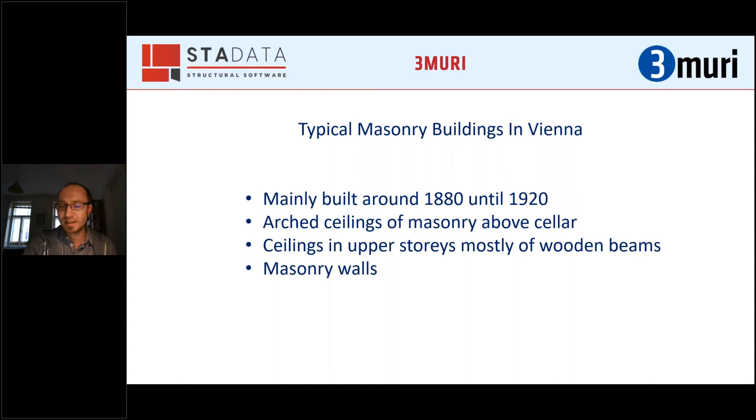Our planning tasks consist mostly of typical things: removal of walls, addition of an elevator or parking garage, and last but not least, the attic conversion, which is the most typical thing. Addition of elevator and parking garage comes together with it because this is bound together by the authorities. If you want to build an attic conversion, it is a must that you also build an elevator and parking garage. So that means in that case you have to take care of all of these parts.

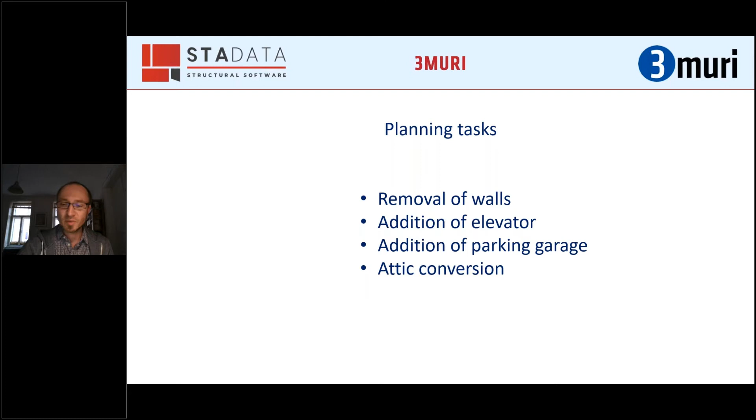The material part is mostly tested with in-situ tests. Sometimes they also take some parts of the bricks and the mortar, but it is mostly done with in-situ testing. You can see these are more or less the characteristic values I was writing there, which we found here.

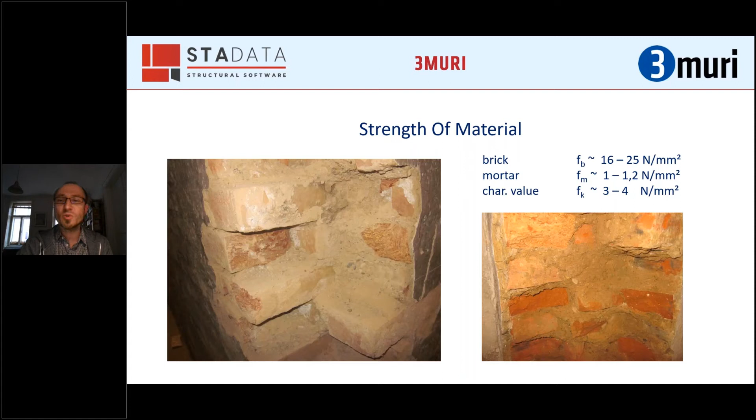For typical floor plans, this is the most standard case, where you have the outside walls. The street wall is one here, then you have a middle wall and the back wall on the garden side or courtyard side. All the wooden beams in the ceilings go from the outside walls to the inside walls, so that means these walls are the main walls for that building. This is the main typical floor plan.

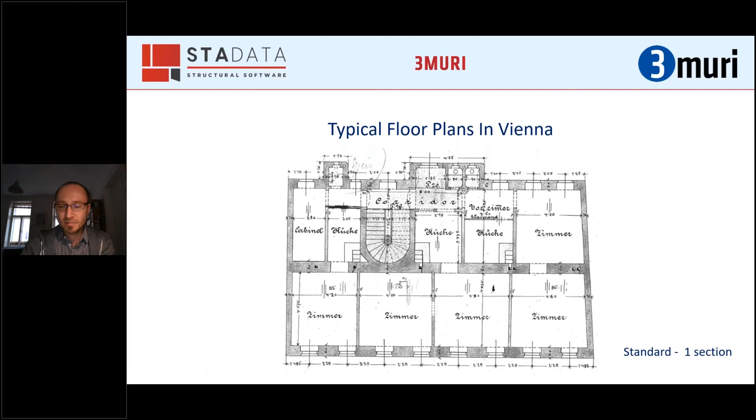And there are slightly some other typical types. This one is like a corner building type, which very often causes some problems in that corner, in my experience.

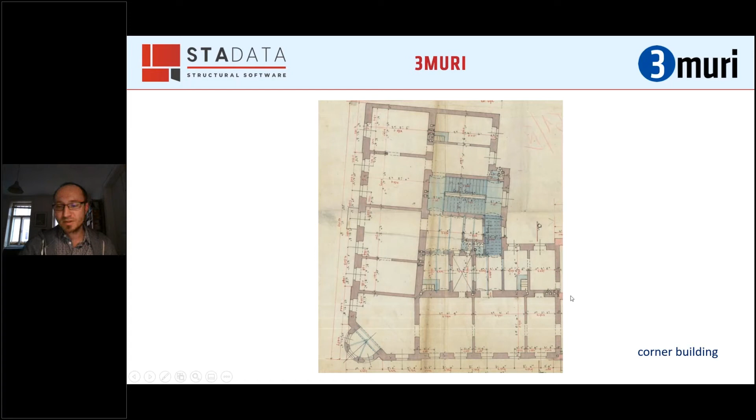The next one, which is also very common, is the typical two houses with the staircase in between. It can be like on the left side, where you have the staircase directly, but then you have a split level between the two houses. The other possibility is like on the right side, where the staircase is rounded, so you don't have any split level there.

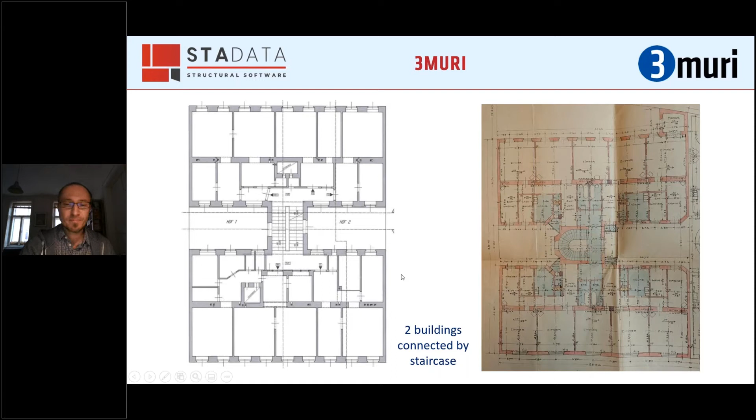So that is what I told before already: the main walls are where all the loads go through, and there are secondary walls in the y direction.

Main walls have typical sizes around 60 centimeters in the upper stories. They get a little less, like 45, except the middle wall. The middle wall is, you could say, 60 centimeters from the ground floor to the attic level, because there are also chimneys inside very often.

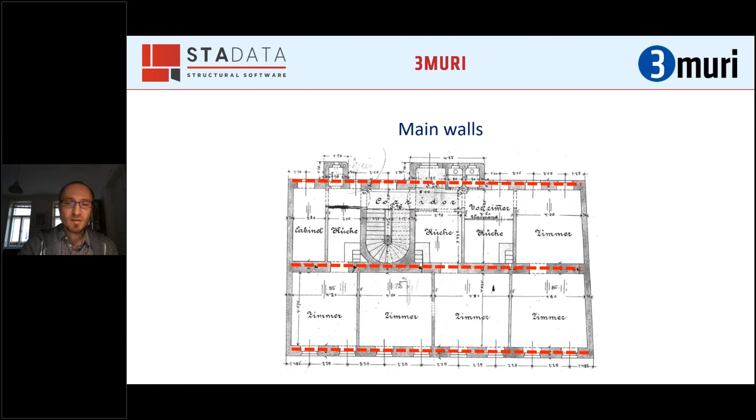The secondary walls are the walls to the neighbor on that side, mostly 30 centimeters, and at the attic level only 15. The staircase walls are also like 30 or 45.

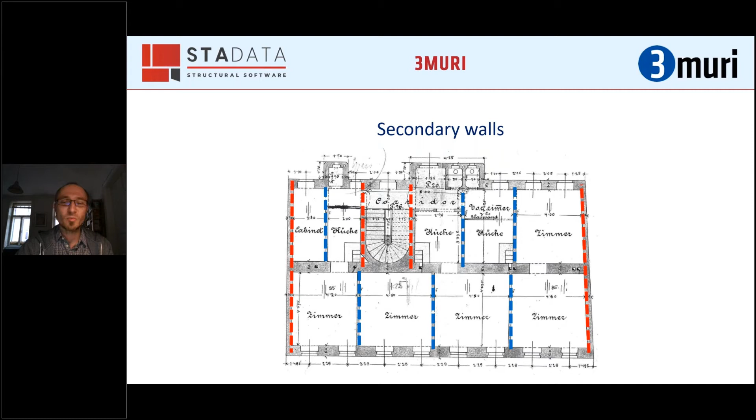Then there's this special thing: extra walls that are rectangular to the outside walls. They are very thin walls, they don't take any loads, they're just for dividing the building in between. These walls are mostly the important factor.

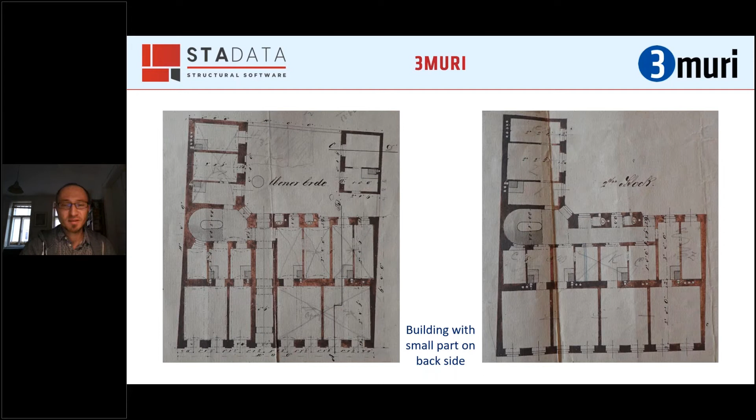Then there are some different ground views, you can say. This is a combination of the standard one with a small part on the backside. This is a huge type, two buildings with two staircases, or a corner building with a small part on the backside with also two staircases. But all these different ground views you will see are similar in wall thickness and ceilings.

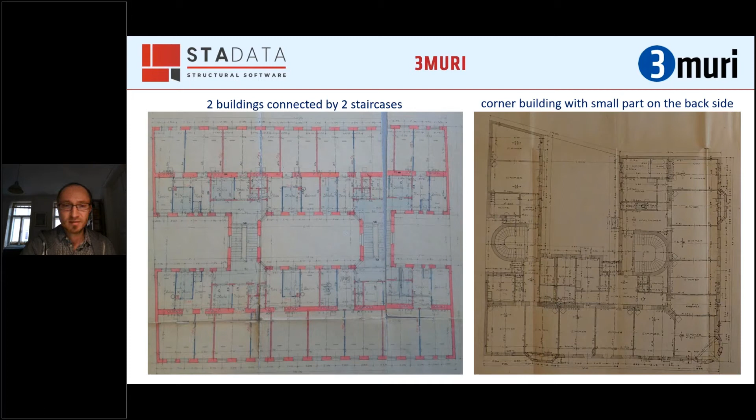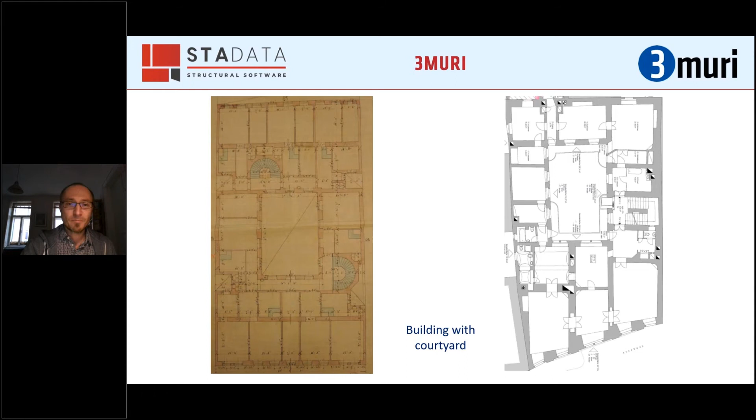Also, sometimes you will find houses with a courtyard inside where the house goes around. This is a special big one that goes around and has a circular corridor inside which also goes around. This means you have a staircase here, a staircase here, and all connected with one corridor which goes around.

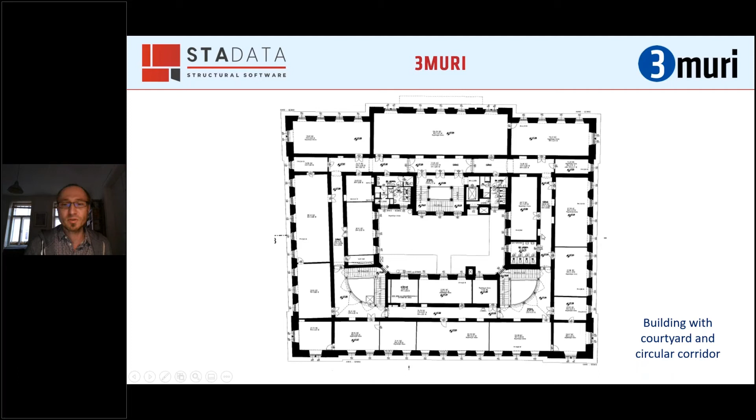Ceiling constructions: we have also very typical wooden beams. Of course, this is the standard which you find in almost every house. These are typically 20 to 26 centimeters, sometimes the height can be a little bit more, 30, but this is really seldom.

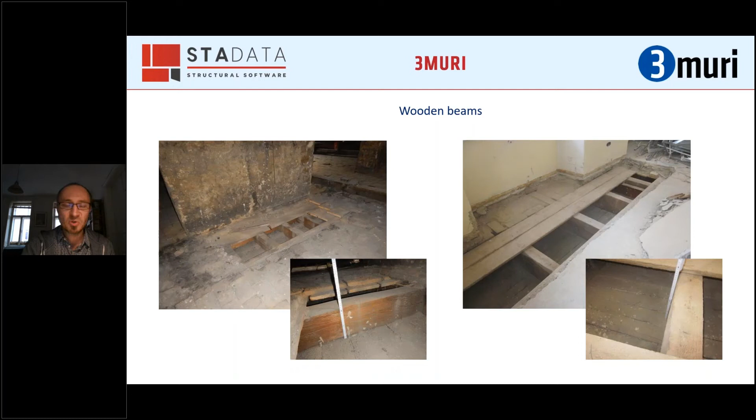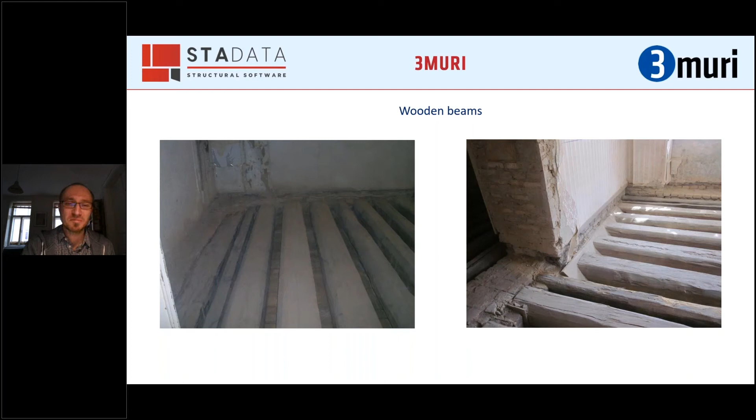This is a very massive one. I just put it here because it was a nice picture. This, I must say, is a building which is a little bit older than what I mentioned before, so that is a very massive ceiling.

And then we have that Dippelbaum ceiling. I did not translate that because I was not sure what I could find in English. That means you have one wood to the other, and they're connected with solid wooden pegs, so that gives that construction a very solid type. This is found mostly as the last level above the third story or so, you will find very often this type of ceiling.

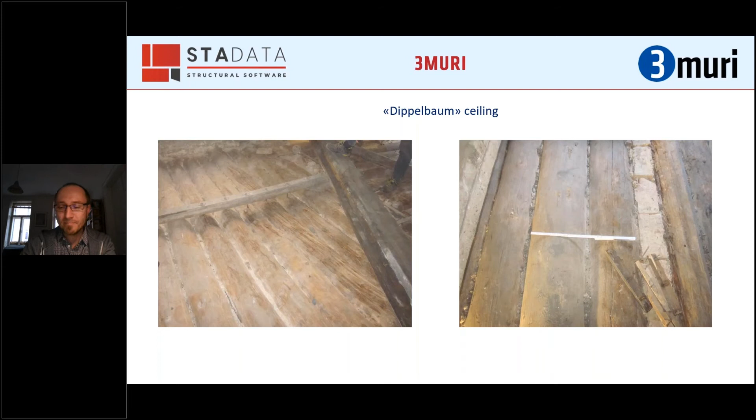And then in the later part of the period, you will find not only wooden beams, you will find steel beams, and between the steel beams you will have the wooden beams. Steel beams then have a distance of 3 meters or something like that, so the wooden beams inside are a little bit smaller than before.

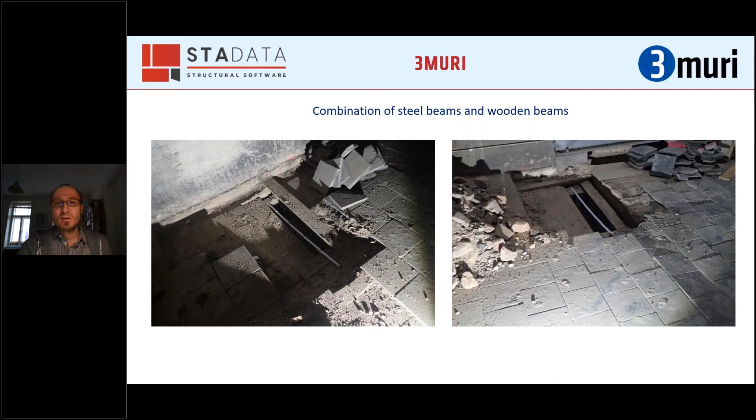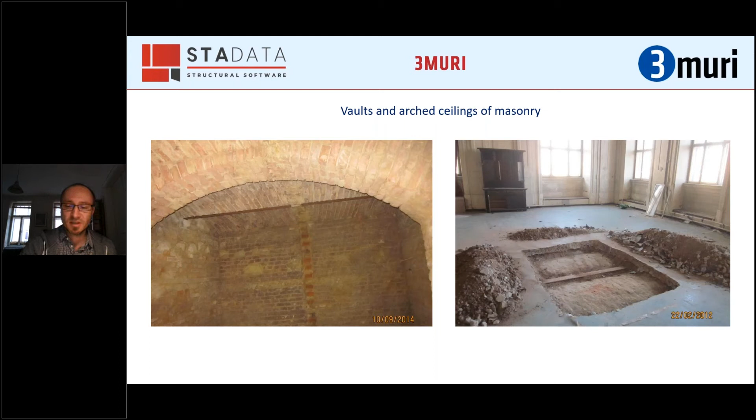Of course, vaults and arched ceilings of masonry are mostly found in the cellar or above the ground floor. Sometimes in bigger buildings, you will find it also in almost every floor, and typically the ground of the bathrooms or something like that are mostly built up with these ceilings. This is also a cellar type vault, which is typical to find.

And then the strengthened construction is mostly done by the composite structure of wooden beams and a small concrete slab, around 8 centimeters, which gives that ceiling a lot of stiffness, so that you connect all walls of the building in that area of the ceiling.

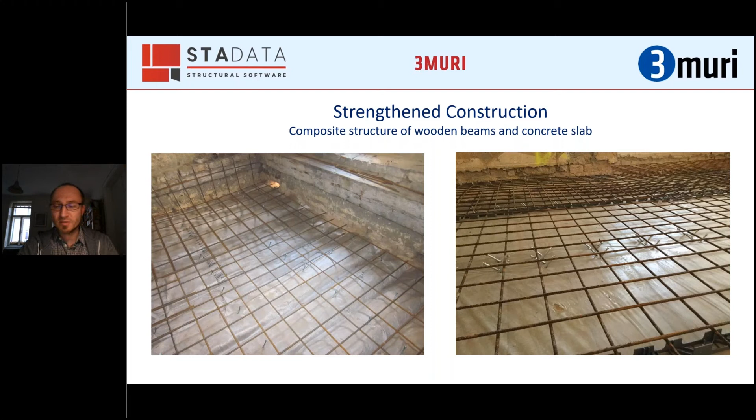Then, by the authorities, until 2008 or so, there was a standard here regarding the seismic loads. And then from 2008 started the era of the EC8. In the beginning, it was a very difficult thing with the attic conversion because it was not clear how to do that in a static analysis.

And then in 2013 came the new national annex, and here it was found the possibility, similar to the Swiss standard, because all buildings don't have 100% earthquake resistance - it's really rare to find that. So that means we have to see what's the resistance of the existing building and what's the resistance after the construction.

And this is also done before with a reliability analysis. I just try to translate a little bit and put some examples.

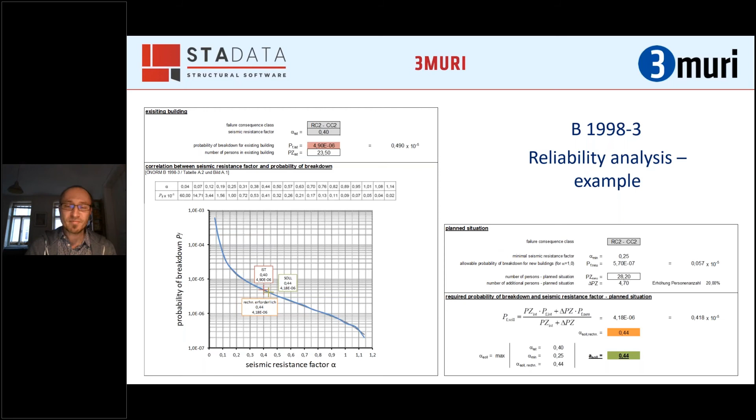So if I put in the existing building's resistance factor, the number of additional persons, and a required resistance factor, then we are calculating the resistance factor - sorry, I did not translate that - we get a resistance factor after changing the building with the additional persons and additional loads from the attic story. And then this must be fulfilled, then the authority will accept.

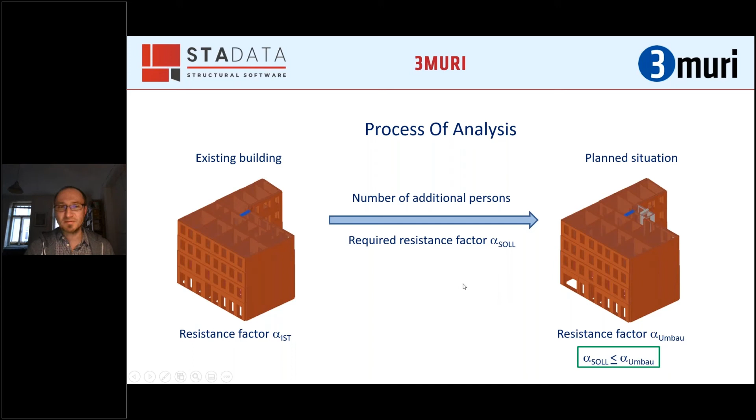What I forgot to mention, it's important to know: additional persons is only 20% more than existing in the existing building. So that does not mean you can bring up more than 2 flats extra in that case.

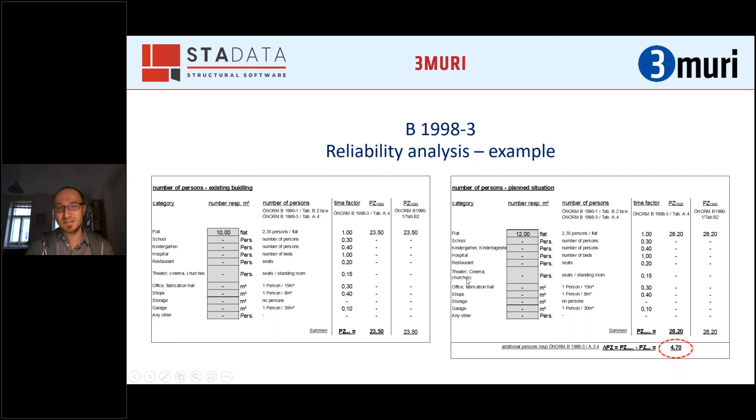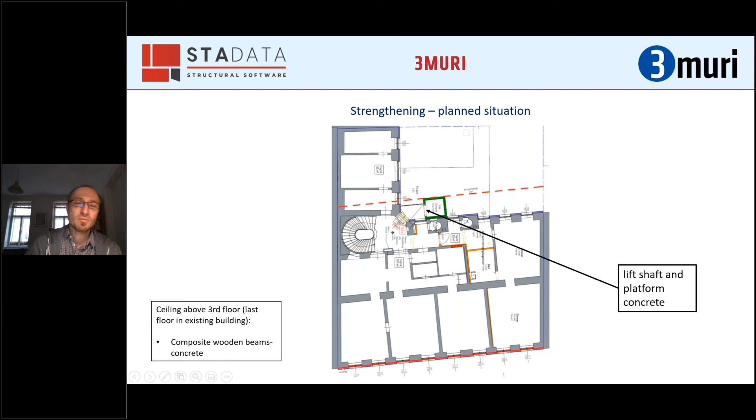The strengthening was the ceiling above the third floor, because that was also wooden beams, and there will come composite wooden beams with a concrete ceiling, which connects all the inside walls and can transport the shear forces from one wall to the next one, activating walls like that or like that. And also, of course, there is a lift here in concrete, which will bring a positive effect.

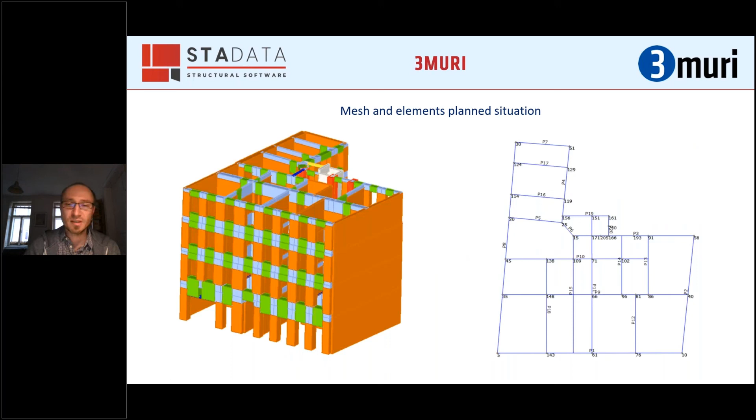And then we are calculating that plan situation - the building stays the same, only loads will be changed, and the lift and the ceiling are coming. And you will find the important element here, and we could raise the seismic resistance by around 10%.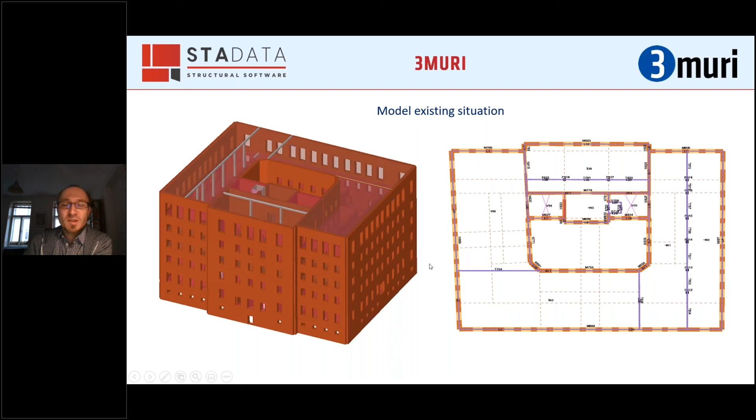So that is also the existing situation you see here. Special is that here in that story there's a big hall, you can say - these rooms are around 7 meters high or so. And then we were again calculating that in 3Muri.

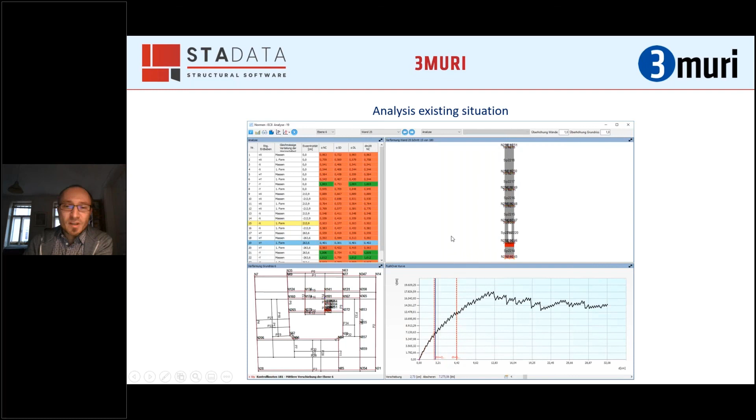Found there was an existing concrete shaft inside - found the element. And then here some more strengthening was done, such as steel frames in those areas.

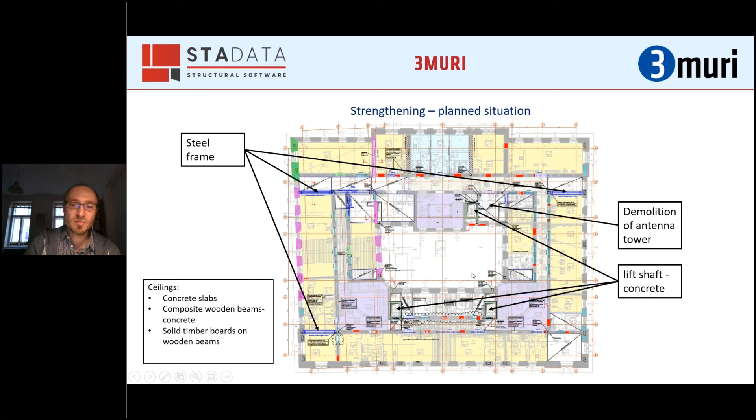Ceilings, all ceilings were stiffened with either concrete slabs or composite wooden beams and concrete, or solid timber boards on wooden beams. And also new shafts for lifts were built inside and connected with concrete slabs to the rest of the building. And then it was calculated again - you see here these lift shafts inside.

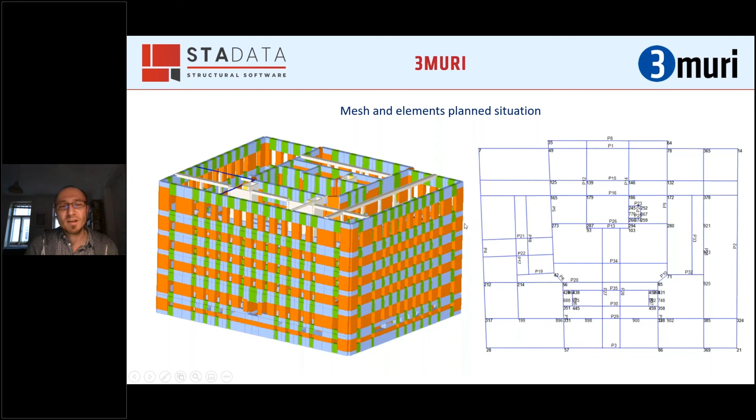And again, we got after that the new seismic resistance.

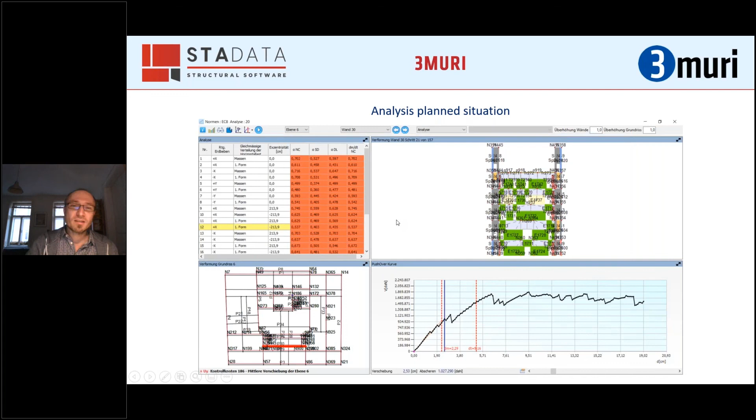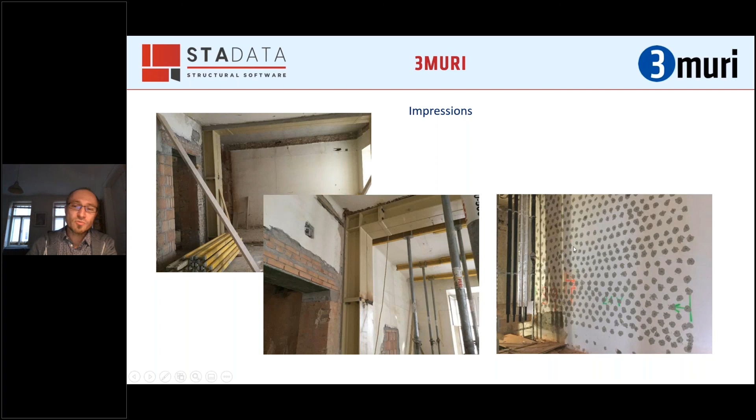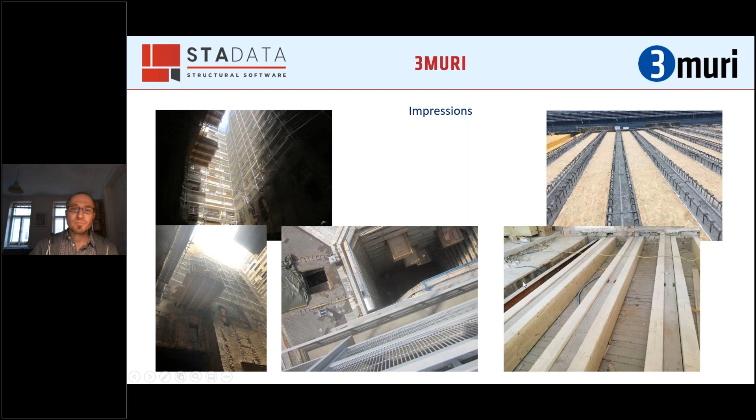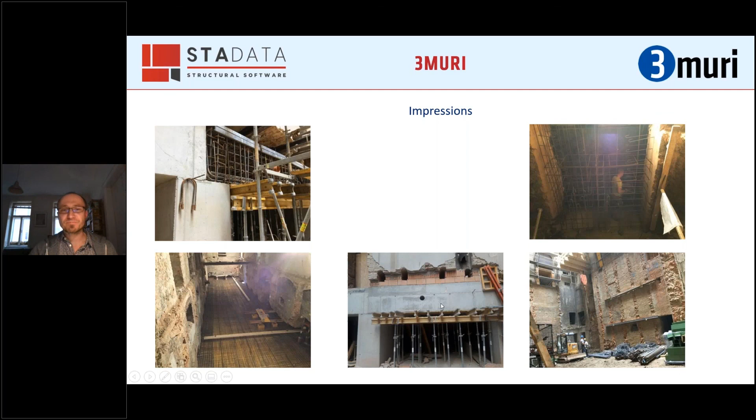There were also a lot of concrete works done, because that building had 3 basement floors which got a garage inside, and then this is the building after all constructions were done, how it is now.

So that is more or less the end. Thank you very much.